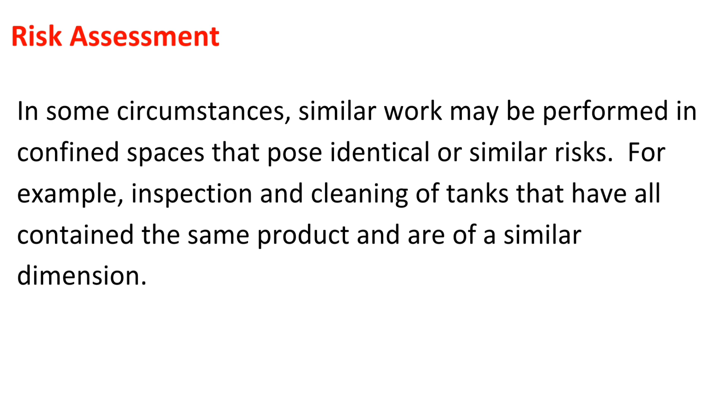In some circumstances, similar work may be performed in confined spaces that pose identical or similar risks, for example inspection and cleaning of tanks that have all contained the same product and are of a similar dimension. In these cases, a common task risk assessment may be used for meeting the requirements of this section. Any common task risk assessment will identify differences between the confined spaces and any variation to the work method being performed.

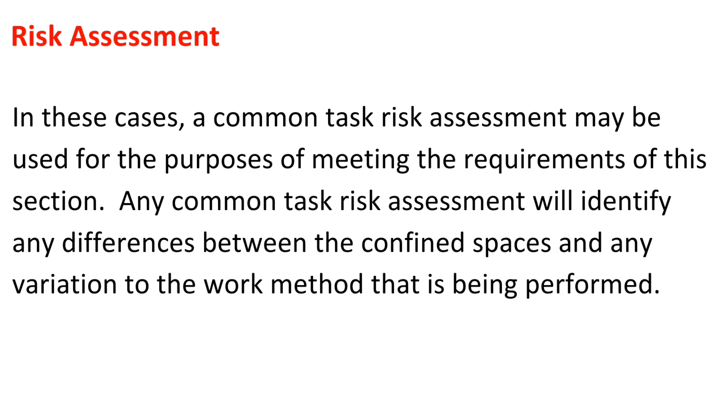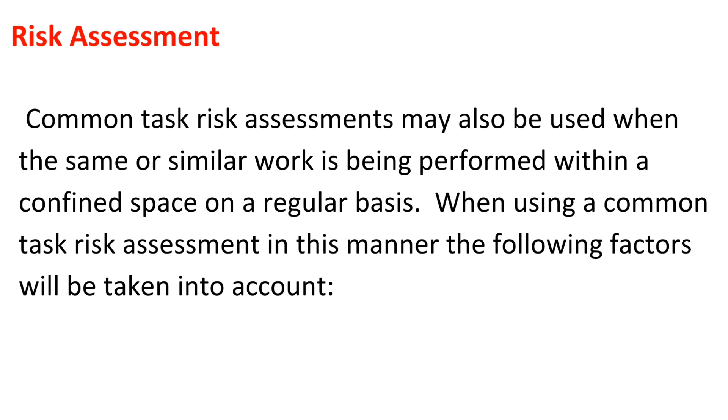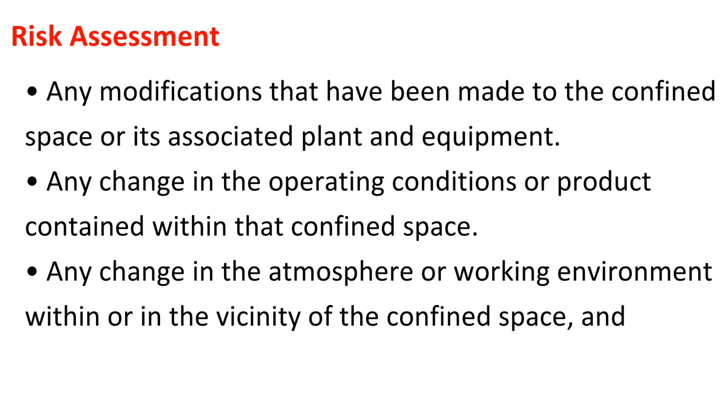Common task risk assessments may also be used when the same or similar work is performed within a confined space on a regular basis. When using a common task risk assessment in this manner, the following factors will be taken into account: any modifications made to the confined space or its associated plant and equipment, any change in operating conditions or product contained within the confined space, any change in the atmosphere or working environment within or in the vicinity of the confined space, and any change in the work method.

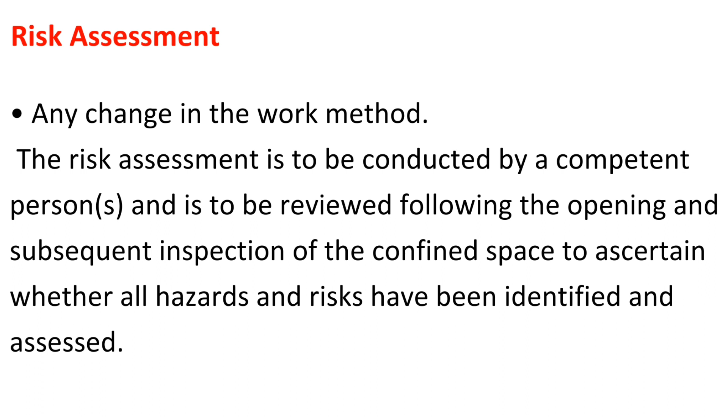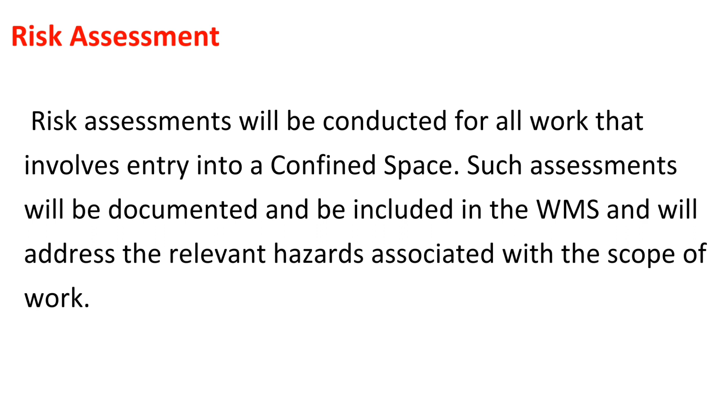The risk assessment is to be conducted by a competent person and reviewed following the opening and subsequent inspection of the confined space to ascertain whether all hazards and risks have been identified and assessed. Risk assessments will be conducted for all work involving entry into a confined space. Such assessments will be documented and included in the WMS, addressing the relevant hazards associated with the scope of work.

Work method statement. The subcontractor will provide a WMS, inclusive of emergency response details, including equipment and lifting or attachment points for rescue purposes. Emergency details will be discussed with the emergency response coordinator prior to initial entry. The WMS will also address the safety controls to be implemented for all equipment used within the confined space, including but not limited to gas cutting equipment, compressed air, welding, grinding, abrasive, hydroblasting, and painting.

The WMS must be made available to each employee entering the space and discussed as part of the start of shift pre-task meeting. Job safety analysis.

Prior to the commencement of any work inside a confined space, all hazards associated with both the confined space and the work to be performed will be identified. A JSA addressing task-specific hazards must be undertaken prior to any CSE. The JSA must be made available to each employee entering the space and discussed as part of the start of shift pre-task meeting. The entry supervisor will include and attach to the JSA a specific checklist to be completed prior to initial entry.

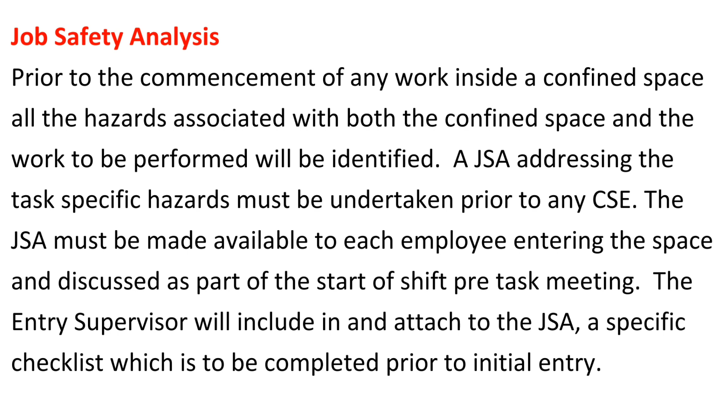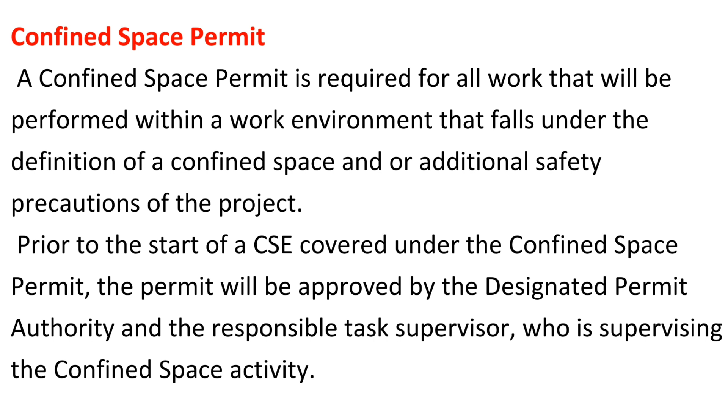Confined space permit. A confined space permit is required for all work performed within a work environment that falls under the definition of a confined space and/or additional safety precautions of the project. Prior to the start of a CSE covered under the confined space permit, the permit will be approved by the designated permit authority and the responsible task supervisor supervising the confined space activity.

Medical assessment, fitness of entry personnel. They will ensure that personnel who may be considered for CSE work have had their physical condition and fitness assessed as part of the pre-employment medical assessment for general medical conditions and complaints, that is heart conditions, asthma, lung conditions which create shortness of breath, claustrophobia, obesity, etc.

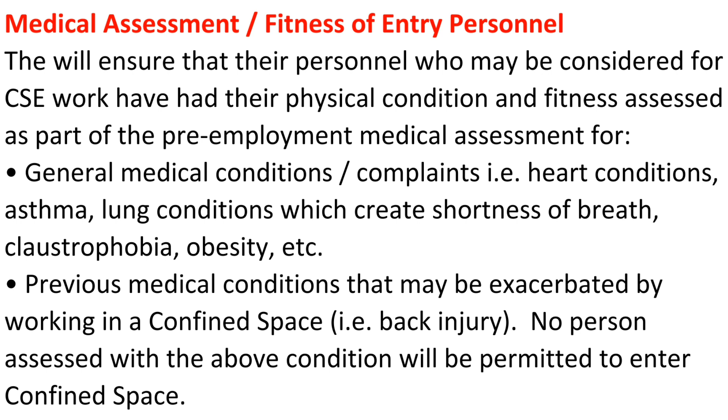Previous medical conditions that may be exacerbated by working in a confined space, that is back injury. No person assessed with the above conditions will be permitted to enter a confined space.

Safe access. Entry and exit to the confined space will be by one designated access opening and controlled by one entry attendant. Where there is more than one access way, entry points to the confined space such as manholes and flanges will be secured with suitable barricades and danger do not enter signage. Additional signage may be required to be displayed by the subcontractor indicating the potential of a particular hazard inside the confined space. Access ways will permit rescue of all personnel who enter the confined space, and together with the surrounding area will be kept clear of any obstructions.

It may be necessary to provide stairs or ladders to the access levels to gain safe convenient access for work, and provide scaffold platforms externally and internally for rescue purposes. The used platforms may be required for safe access and egress and must be included in the risk assessment.

Signage. If permanent danger authorized personnel only signs are not posted, the entry supervisor will ensure an appropriate danger sign has been located near all entrances into a confined space prior to and during personnel entry, and throughout confined space operations while normally closed entrances are open.

Atmospheric testing. All confined spaces must be thoroughly ventilated prior to entry. Confined spaces that have contained toxic substances or inert gases will be mechanically ventilated and gas tested prior to entry. The CSE issuing authority will define on the CSE permit any atmospheric testing requirements. A trained and authorized gas tester will perform an atmospheric test prior to entry, after each break, after lunch, and at the commencement of each shift.

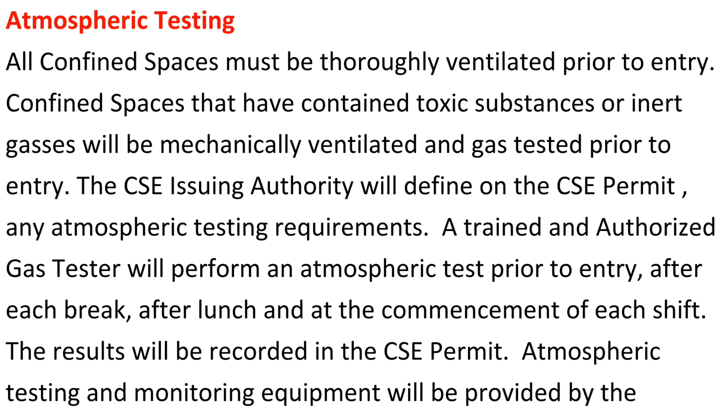The results will be recorded in the CSE permit. Atmospheric testing and monitoring equipment will be provided by the subcontractor to cover their scope of work and comply with relevant national statutory regulations and standards.

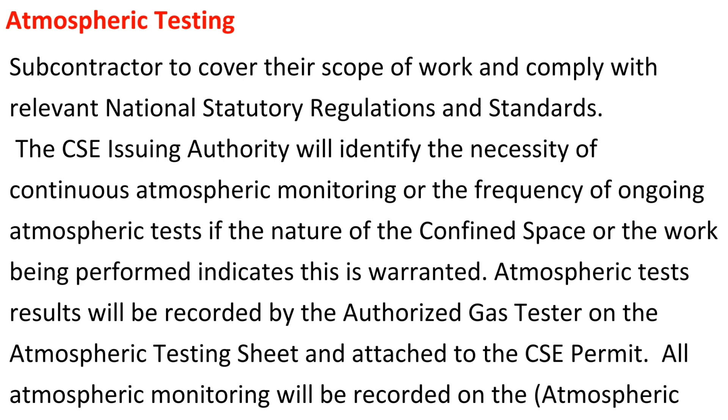The CSE issuing authority will identify the necessity of continuous atmospheric monitoring or the frequency of ongoing atmospheric tests if the nature of the confined space or the work being performed indicates this is warranted. Atmospheric test results will be recorded by the authorized gas tester on the atmospheric testing sheet and attached to the CSE permit. All atmospheric monitoring will be recorded on the atmospheric monitoring testing log, Appendix 2.

Where necessary, the confined space will be cleared of contaminants by use of a suitable purging agent. The purging agent or any gas used for ventilation purposes will never be pure oxygen or gas mixtures with oxygen content greater than 21%. As an absolute minimum, oxygen content and propane percent LEL will be tested at each atmospheric assessment. Other contaminants potentially present will be tested prior to entry and when any repeat atmospheric tests are required.

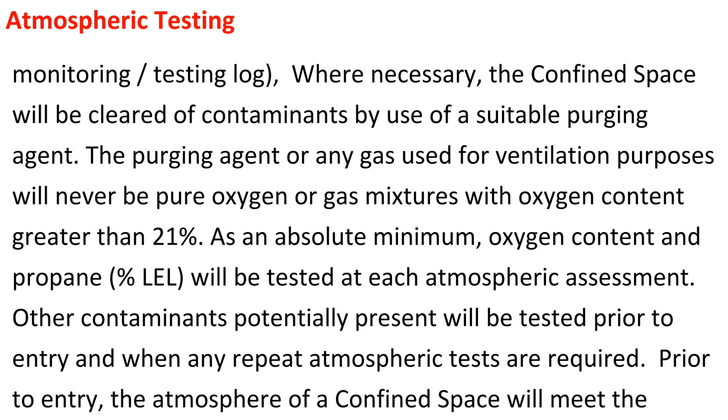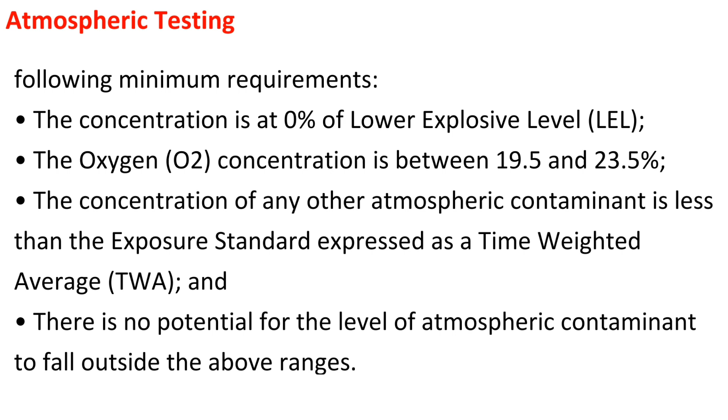Prior to entry, the atmosphere of a confined space will meet the following minimum requirements: the concentration is at 0% of lower explosive level, LEL; the oxygen, O2, concentration is between 19.5 and 23.5%; the concentration of any other atmospheric contaminant is less than the exposure standard expressed as a time-weighted average, TWA; and there is no potential for the level of atmospheric contaminant to fall outside the above ranges.